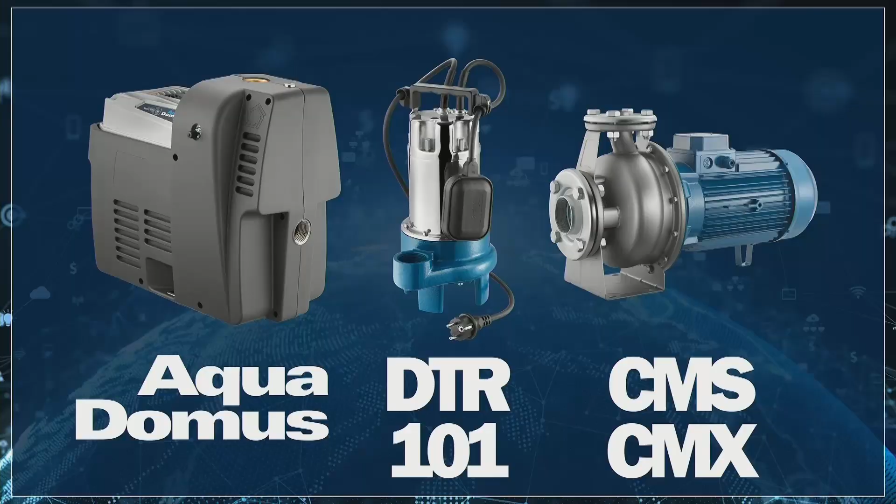During the first part, we concentrated on the domestic and residential sectors, introducing the plug-and-play, energy-saving, smart electronic booster system Aqua Domus, the DTR sewage pump with grinder, and the new line of stainless steel flanged centrifugal pumps.

Today, we will focus on the industrial segment, outlining the great potential that our range can grant. We will show you some case histories of our pumps and introduce the new line of split case and borehole pumps.

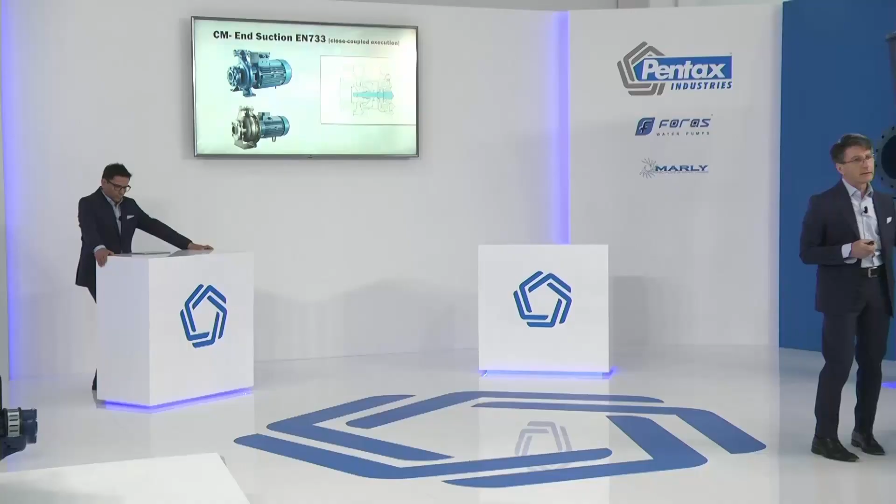So let's start with the end suction, the so-called standardized pump, the EN733 products. This is a very popular pump in the market, known since very long. I mean, it's one of the most classic executions in the market.

And in the market, this pump is known in three different executions: the close coupled, which is the more compact, the lighter one; the stub shaft, which is the medium size for medium power motor size; and finally we have the frame mounted, which is the heaviest, the more capable in terms of performance, in terms of executions, and so on. Pentax is offering today all of them.

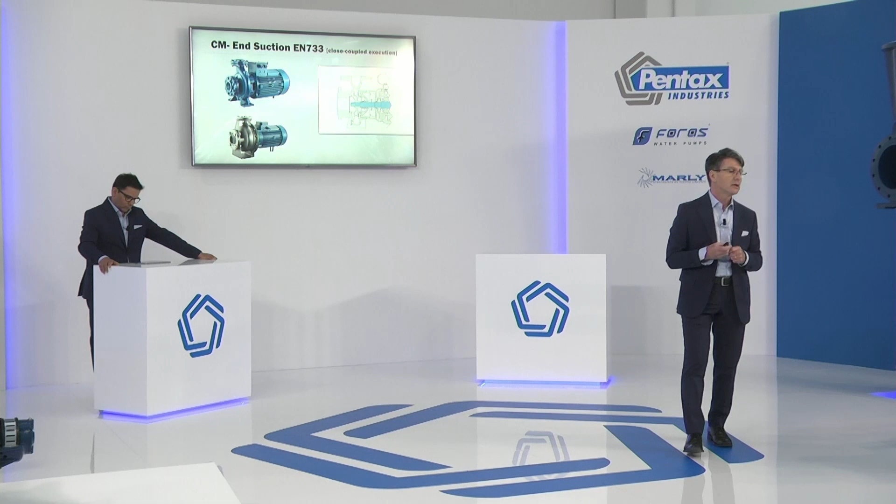So let's look at the close coupled, which is, as I said, the lighter of the three executions, where you can see in the drawing, beside the picture, that we have this blue element. It is the common shaft. The shaft is in common with the motor and the pump.

So that's why the motor, which is a Pentax one according to European efficiency class IE3, has special extensions in order to hold the impeller, and therefore you have a very compact design. At the same time, you have some limitations on mechanical structure. So these executions can handle up to a maximum of something like 37 kilowatt motor size.

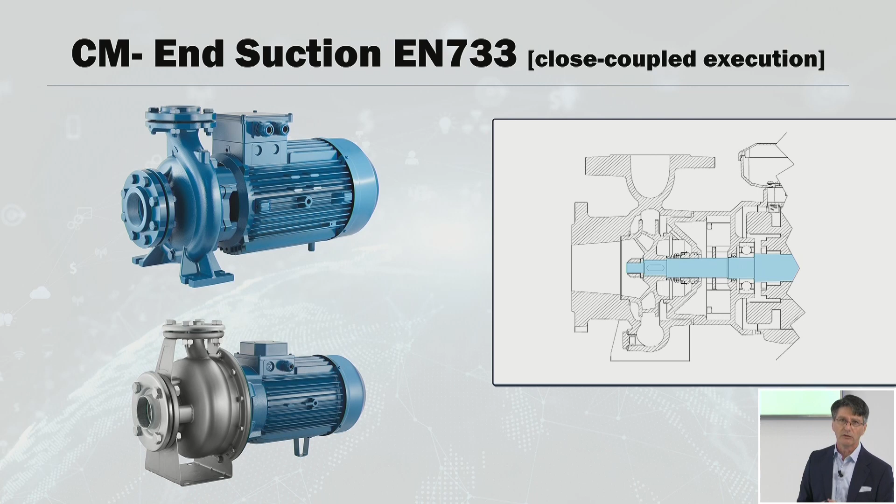Then we have the medium-sized structure, the so-called stub shaft executions. And there we have, as you can see in the drawing, standard motor extensions with the standard B35 flange. So this has a feature that you can locally source the motor in case of servicing. Then you can retrofit the motor according to your needs. So you don't need a special motor or a special shaft.

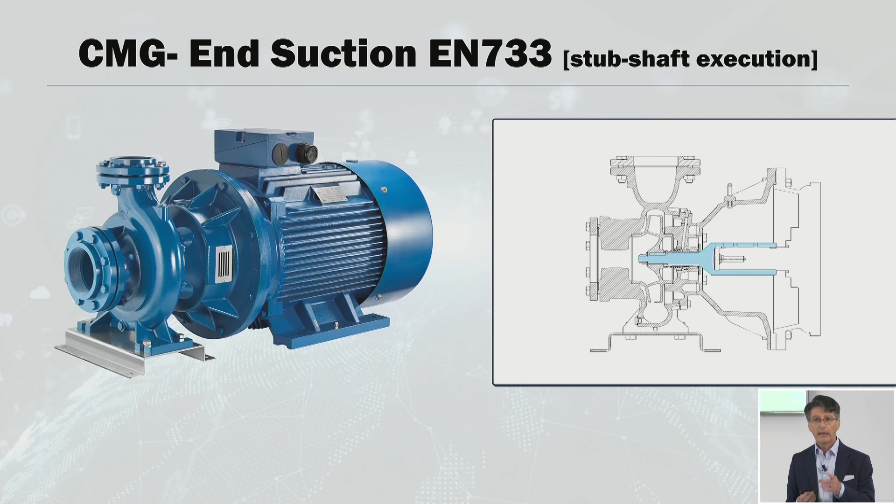And then you can see again in the picture the blue parts. This is the shaft that will enter into the pump, and this is the stainless steel extension as well. With this execution, we are able to cover up to 90 kilowatt motor size. An additional feature on this execution is that we can offer you a full 316 stainless steel pump. So this execution can be suitable for some light industrial applications on the market.

And then we have the frame mounted. The frame mounted, as you can see in the drawing, has an independent shaft. The blue part is the shaft of the pump. And there, of course, the shaft is supported by a bearing bracket very heavily. And after that, we can couple the flexible coupling, B3 execution motor, and everything fixed on the common base.

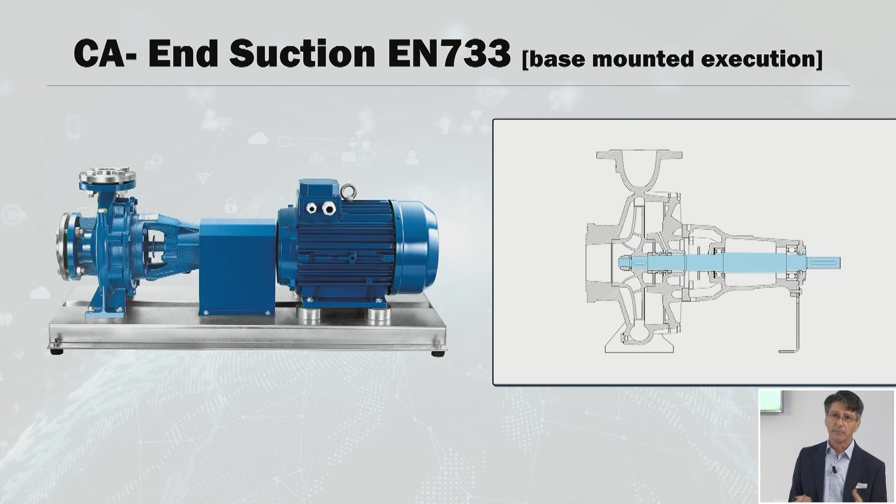This is the more versatile product because you can have cast iron, 316, and duplex material available. So really, this execution is suitable from the residential market up to the more sophisticated and more heavy-duty industrial applications. So it's the most vast pump that can meet all the market demand, let's say.

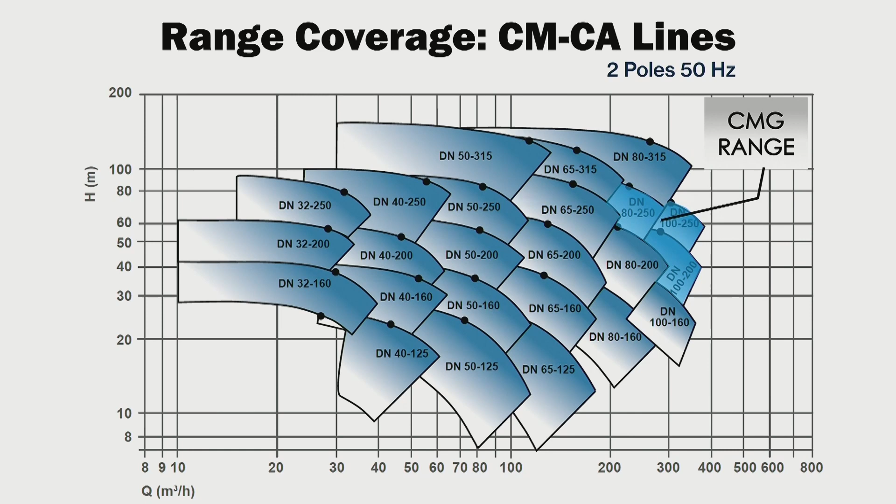Let's now talk about some coverage, some performance information. So this is our coverage for the high-speed pump, or high-speed execution. So the C can be CM, CMG, as well as CA. We can have a maximum flow of about 360 cubic meters per hour. And according to execution, we have a 37 or 90 kilowatt motor installed. You may notice that we have highlighted in a different blue color the new extension of CMG that has been introduced recently, and those are the stub shaft executions that I was mentioning before.

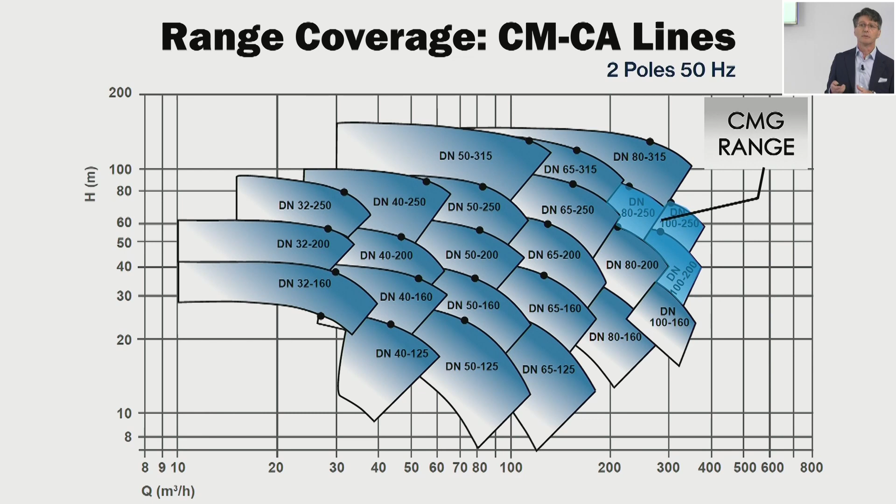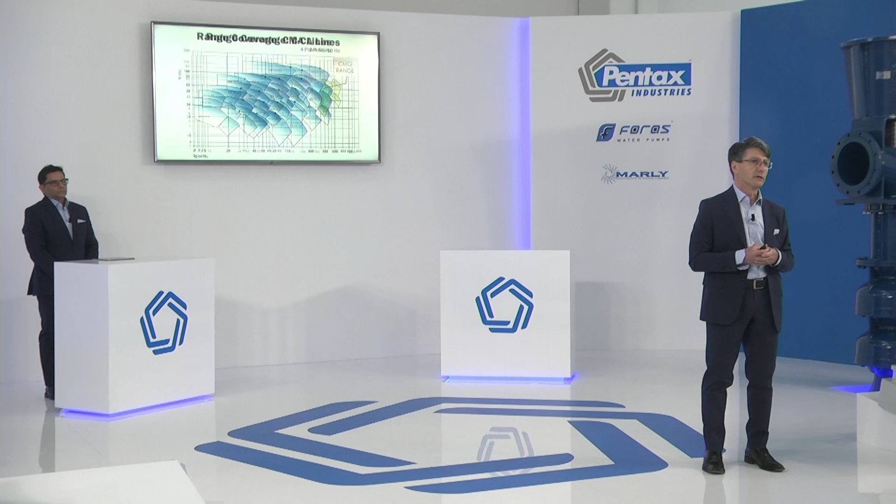Finally, we have the low speed coverage range, and this is the more vast flow range. In fact, we can reach with the newly introduced model up to 1,600 cubic meters per hour. So now we really have a vast and wide range of flow. Pressure-wise, we are about 15 bars because the speed is very low. We are talking about 1,500 RPM, and the maximum power installed is 200 kilowatts. This is a B3 execution motor.

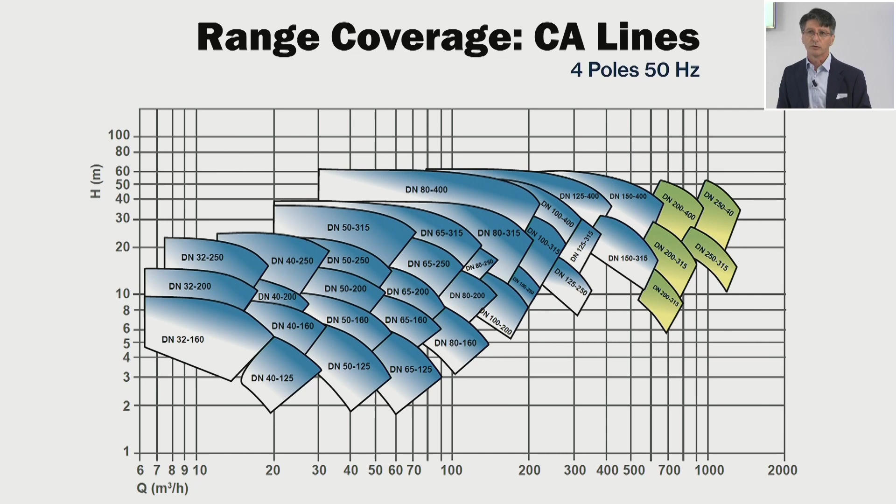Let's have a quick look at the applications. The applications are quite known. The classic application is water transfer, potable water, water distribution, which is the more common application in the market. Of course, agriculture and irrigation is one of the historical applications for this pump.

But then we can have some new applications like water boosting, which is the typical automatic booster sets that normally are installed for feeding towers, buildings, high-rise buildings, and this is becoming more and more frequent and more suitable for this kind of construction market. And finally, we have some industrial applications thanks to the duplex and stainless steel materials available. So we are talking about seawater, reverse osmosis, and any water treatment plant.

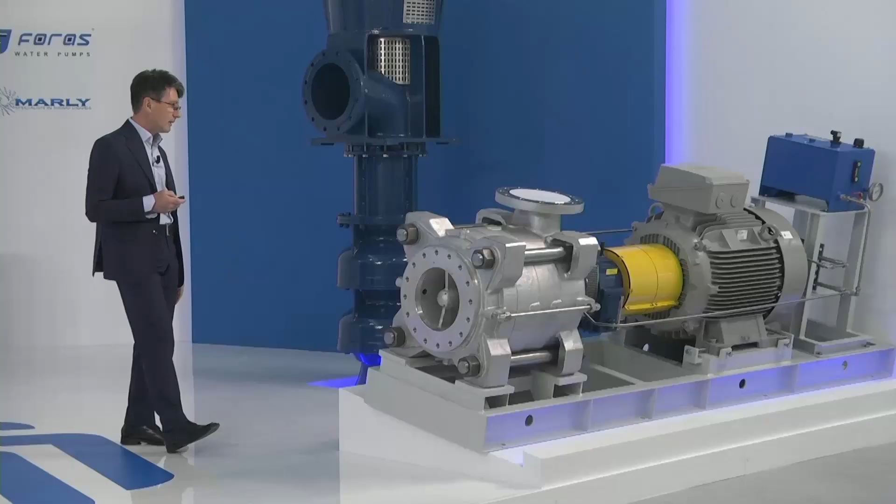Let me now present you the HP line. It is a pump that I have in front of me. This is one of the executions available, which is the axial execution. So we call them HPA executions. Why HPA or axial execution? Because the inlet is exactly in the axial position, so in the front position of the impeller.

What is the feature? What is the advantage to have this position of the flange? Let's say, two main reasons. In this case, we have a very nice suction capability because the piping just enters in the first impeller of the pump. So we can reduce the NPSH characteristic sensibly, much more than a standard pump.

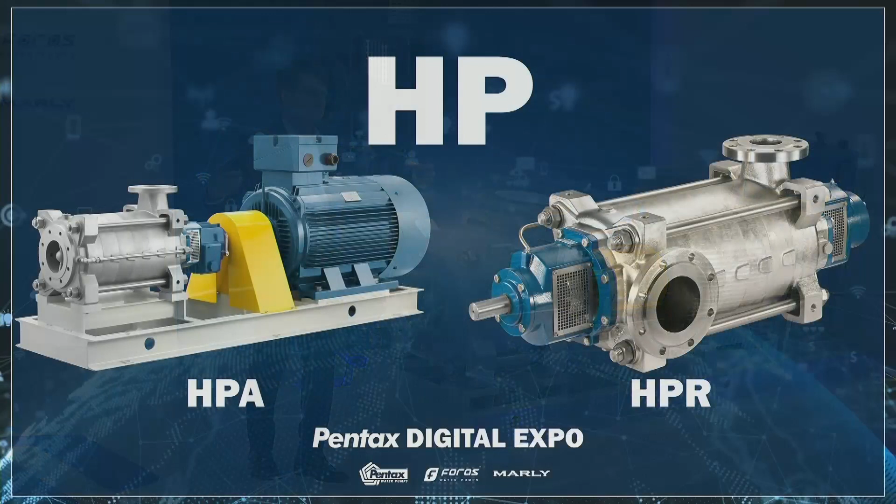The other execution is the radial one, the HPR, which has both flanges, delivery and suction, in the radial positions. And this execution, of course, will have a double bearing housing, and this allows to have many more stages than the axial version, because the double bearing housing can hold the shaft in position, even if we have many stages, and additionally we have a very high axial thrust.

What else? Another important point is that this range is quite a big range of families, because we start from size 32 of delivery, and then we end up to 10-inch, so 250 millimeter of delivery. So just to give you an idea, this is not the biggest pump, but we have additionally a bigger brother than this size.

This pump, like all our product line, is available in 3 different materials: cast iron, 316, and duplex. And this is actually our philosophy. We adopted these materials in our catalog. So in our catalog as well as in our price list, you will see these 3 options of material. Because we learned from our experience that with these 3 options, you can cover 95% of the market demand, starting from the very light domestic application up to the very sophisticated and heavy-duty industrial application. So with only 3 options, we cover practically everything.

A few words about the features. I will not bore you with a lot of technical characteristics, data, performance, and so on, but I would like to spend a few words on only 3-4 points. This pump is available with a double mechanical seal system, and this is the case. In fact, you see this piping entering the bearing bracket on one side and going out on the other side. That is the cooling system of the double mechanical seal.

Thanks to this system, we are flooding the seals with clean, cold liquid, so that in case here we have very hot, very aggressive, and very dirty liquid, the mechanical seal will not see these heavy fluids, but in the sealing phase they will work only with the clean liquid, which is rotating in this piping.

The second feature is what I already mentioned to you, the front suction. Front suction gives you great capability on suction performance. So we can reduce the NPSH sensibly. So in case I have super hot liquids, 150, 180, I have the possibility to reduce the impact in the suction, so as not to have any cavitation effect in this area.

Finally, we have also a cooling fan. It is the picture in your video, number 3, and drawing number 4. This is a cooling fan that is providing a flow of air on the oil bearing bracket, in order to keep the oil cool.

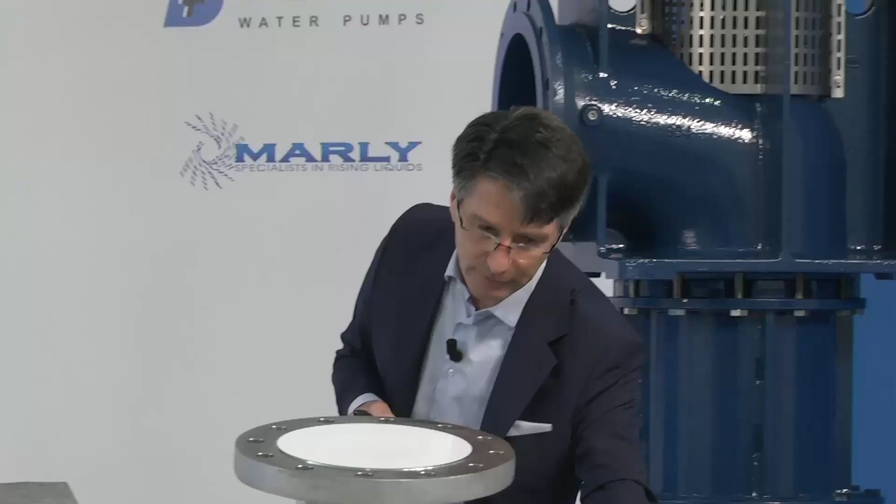So we designed for them this device, including the cartridge mechanical seals. And of course, we also designed an API system for cooling of the mechanical seal. So this was a very nice case.

We supplied them 14 units. 8 of them have been working for about 1 year. Another 4 are going to be installed in the expanded area of the power plant, and 2 more will be used as spares. What's important is that we overcame the problems that our competitor's pumps were facing.

Thank you. Thank you to you, Pierpaolo. A few data points about this installation, then we'll move forward.

The liquid being pumped is brine, at 165 degrees C. The salty content is about 30,000 ppm of chlorides, meaning we are very close to seawater aggressivity.

The sand content is above 100 grams per cubic meter, very thin sand, which provides a very abrasive effect on the blades of the impeller and diffuser. This requires a very low speed pump, a 6-pole pump running at less than 1,000 RPM.

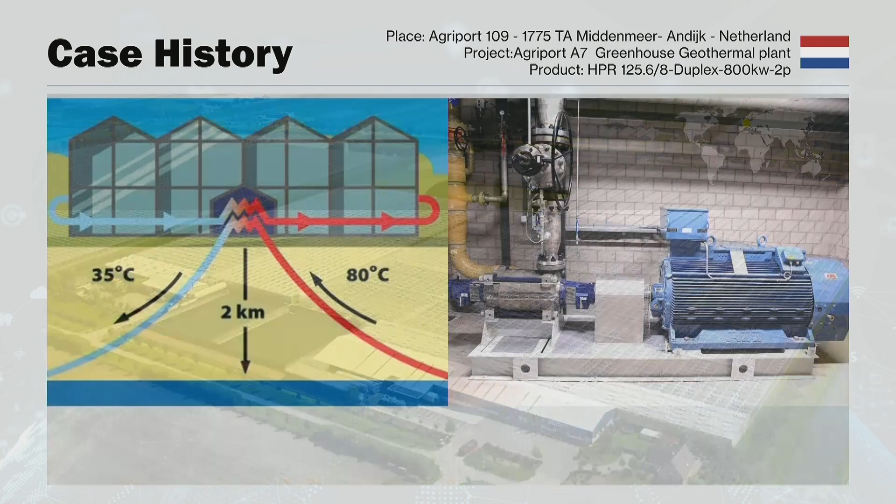In this application, see the drawing, the yellow drawing. What we did there was the re-injection. After the full heating process, they use our pump to re-inject the condensate water back into the ground.

Why re-inject? Why do you need high pressure? You need high pressure because the production wells for the steam are under pressure. To give you an idea, to re-inject the water back down, this pump was running at 55 bars in order to overcome the pressure of the well and push down the liquid that was sucked from the production well.

You can see the photo on the screen. We used an ABB motor, 800 kilowatt size, medium voltage at 6,000 volts, with an ABB inverter, because they need to guarantee stable pressure on the well, otherwise they get problems underground.

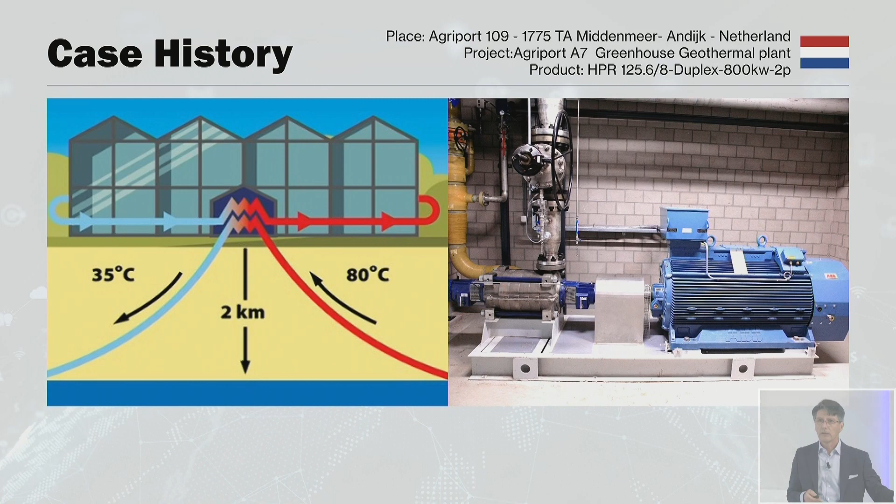Since how long has this pump been operating? We installed this pump about 3 years ago. That's also a good question, because since that time, this pump is still working. No major servicing has been required.

The only thing in our installation manual is the oil changing. Since this pump works 24 hours a day, 365 days a year, in this continuous operation you need to change the oil at minimum every 6 months. Don't forget it - think of it like keeping your car running all day long. You really need to have the oil changed constantly.

So it's a pump on 24-hour duty, 365 days a year. It only stops for maintenance, for the oil change. Please keep in mind that oil bearing lubrication is one of the more efficient methods, because it has good lubricating properties combined with the ability to evacuate heat from the bearing area. That's the advantage of oil lubrication.

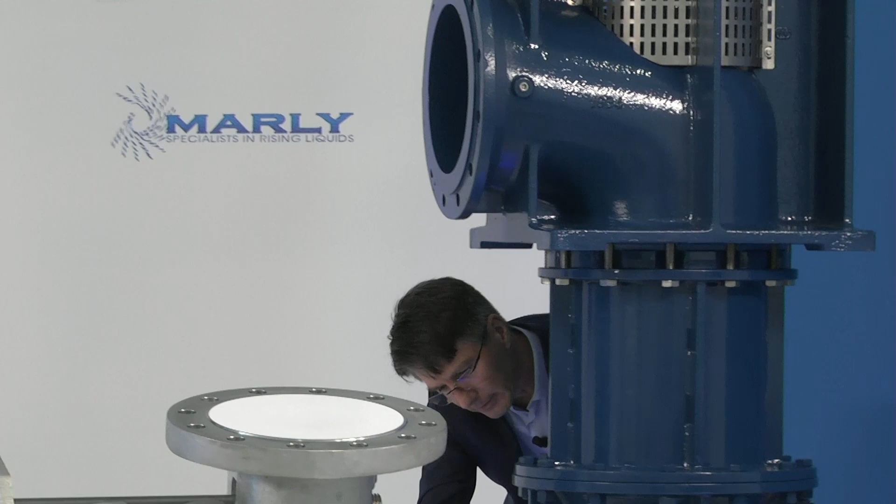Well, let's switch now to the other key product line for us, which is the vertical turbine. Here we have a sample - actually this is the big brother. Our range starts from 6-inch size up to 22-inch size, meaning this sample has a diameter of 22 inches, so 600 millimeters diameter for the stage.

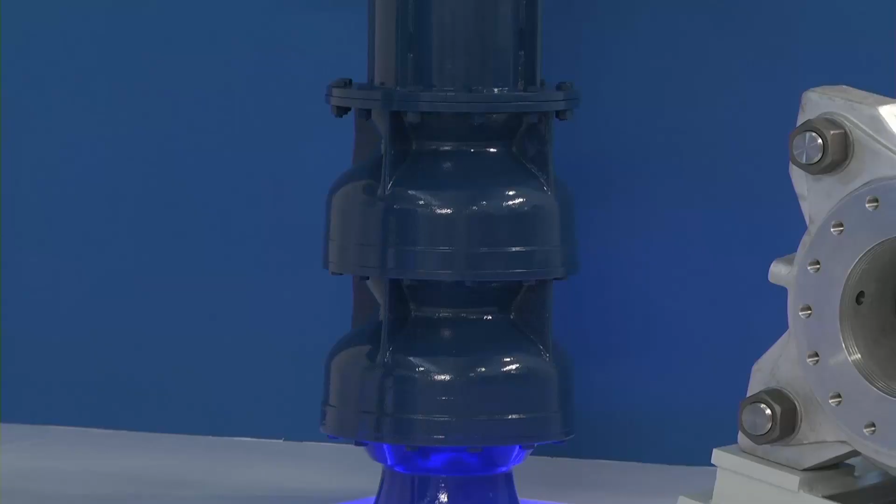This is also an important range for us. Our philosophy is to have 3 materials available: cast iron, 316, and duplex. Thanks to this material availability, you can install this pump for standard potable water up to very chemical or seawater applications, thanks to the duplex material.

No other data, I don't want to bother you with a lot of information, but a few features. Our standard executions use the conic coupling, shown in your picture as drawing number 2. Why do we use conic coupling?

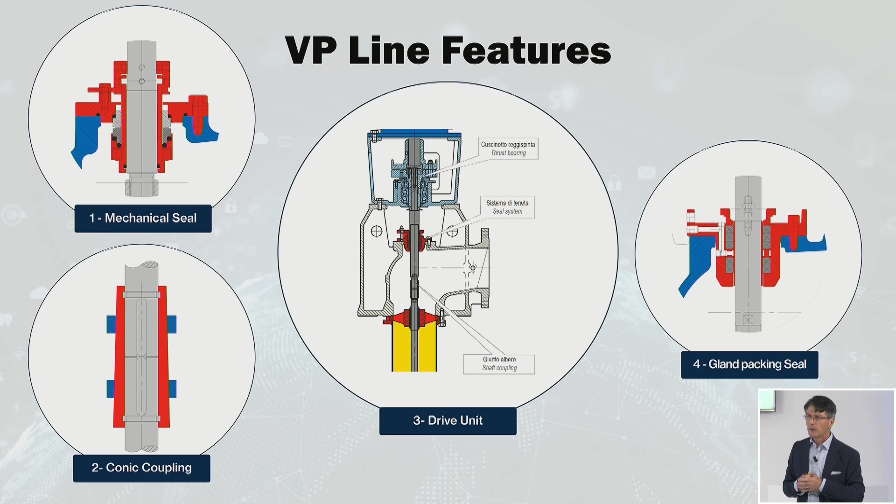The conic coupling is the device which connects shaft to shaft, from the pump to the line shaft to the drive head. Any connection needs to be coupled. If we use conic coupling, we put the shaft in the perfect axial position, so we do not have vibration due to improper positioning of the shaft. Moreover, in case of servicing, we can dismantle easily using these two rings, the blue rings, the two elements. Even after many years of operation, you can get your shaft open, so you don't need to cut or perform a lot of difficult operations to open the pump, disassemble, and reassemble.

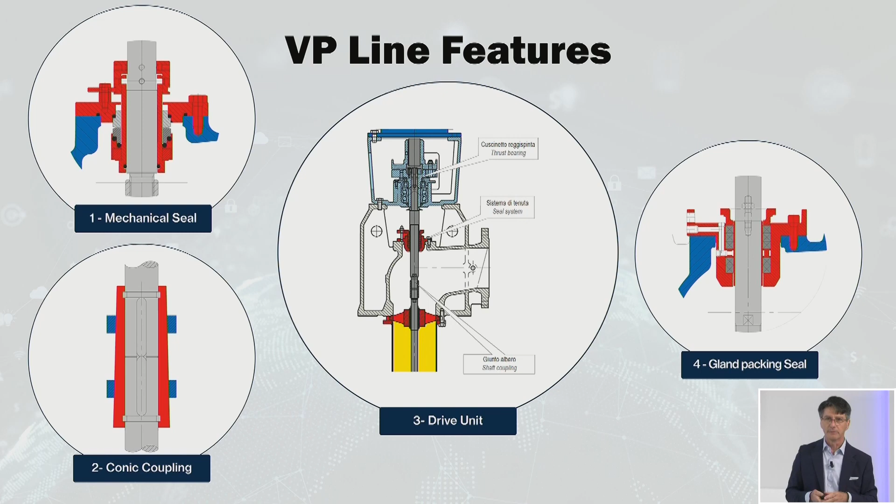Another option is the mechanical seals, located in this area. We could have gland packing, single seals, cartridge, or double mechanical seal in case of very aggressive liquid. Last but not least, in the same drive head, we have the thrust bearing, which can be provided with oil or grease lubrication.

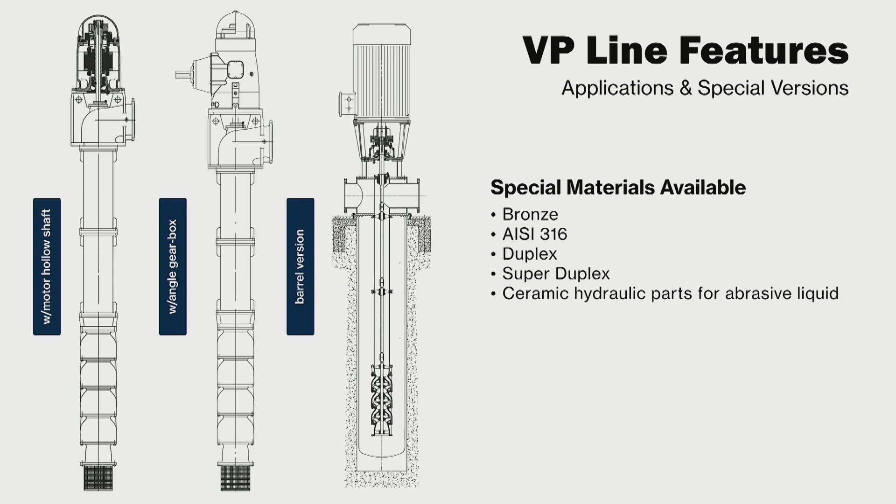Special executions are available. You can see on the drawing, we can have a hollow shaft motor, very common in North America, where the thrust bearing is located inside the motor. The gearbox is the central execution when you need to couple a diesel engine motor, which is very common in rural areas, in agricultural irrigation areas where electricity is not available. Finally, we have the barrel, shown in the right-hand drawing. The barrel is an inline, pressurized tank, typical for boosting, firefighting, or even condensate applications.

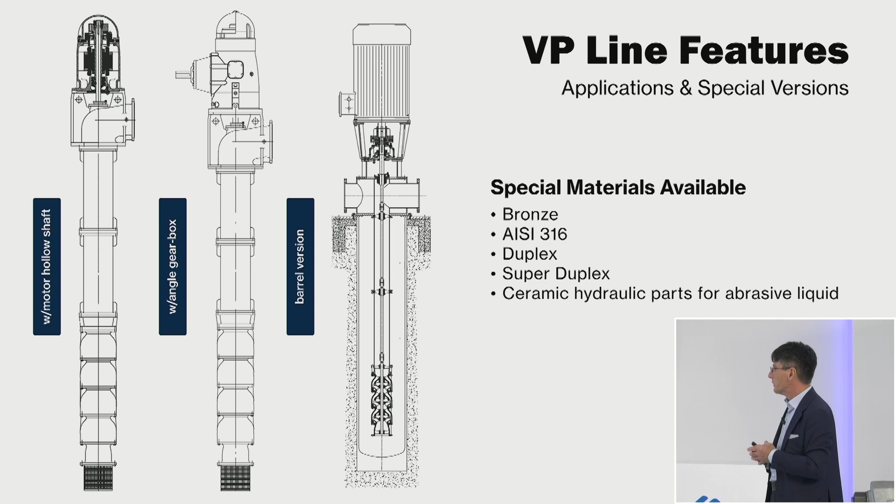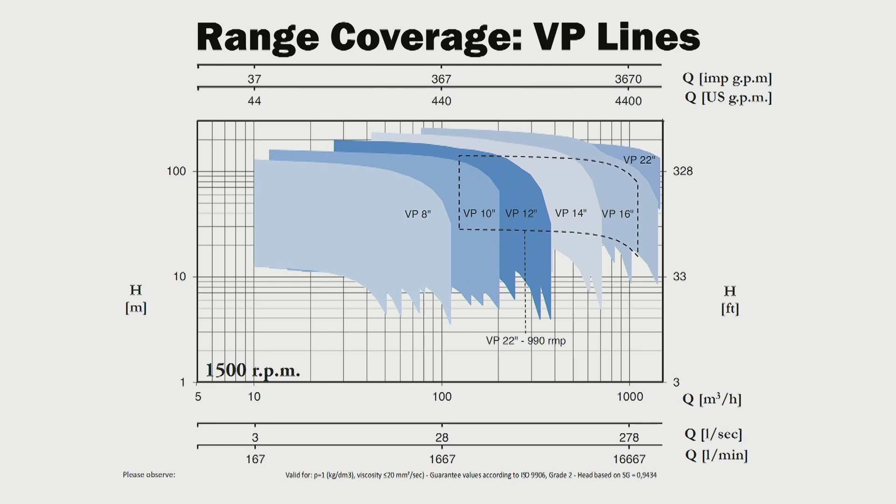Coverage: as I mentioned before, we have a very large flow performance, going up to 1,600 cubic meters, maximum pressure of 26 bar, and installed motor power can be up to 630 kilowatts. But eventually, if you combine with a diesel engine gearbox, this power can be increased significantly.

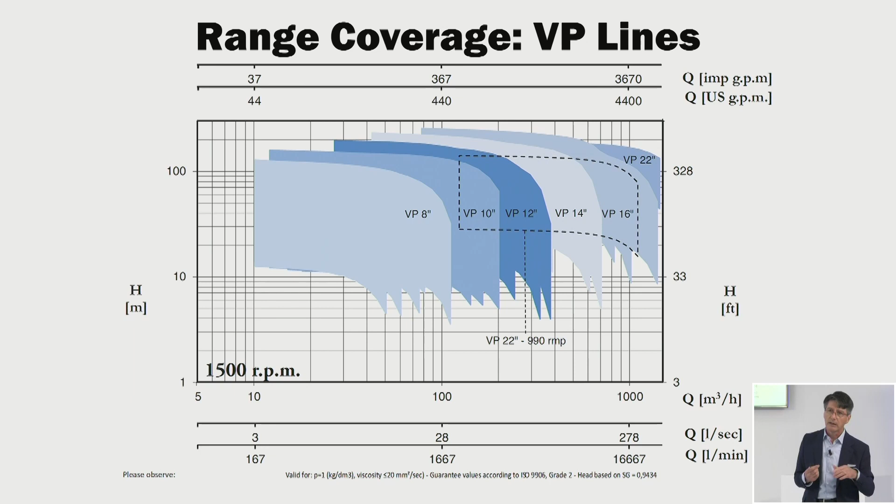Applications: historically, this line was developed for deep wells, back when borehole pumps were not available — we're talking about 20, 30 years ago, this was the only solution. The surface part was here, and the rest was immersed in the well. This was the only case, but now the borehole solution is much more convenient, efficient, and less expensive, so this execution is less used in that application. It's moving more into industrial applications, such as in tanks.

At the top of the tank you have the drive head, and at the bottom you have the hydraulic parts. Why in the tank? Because in case of hot or aggressive liquid, the hydraulic parts are in contact with the liquid, but you keep the motor in a safe, non-hazardous area. So the motor can be standard — that is the great advantage of the vertical turbine.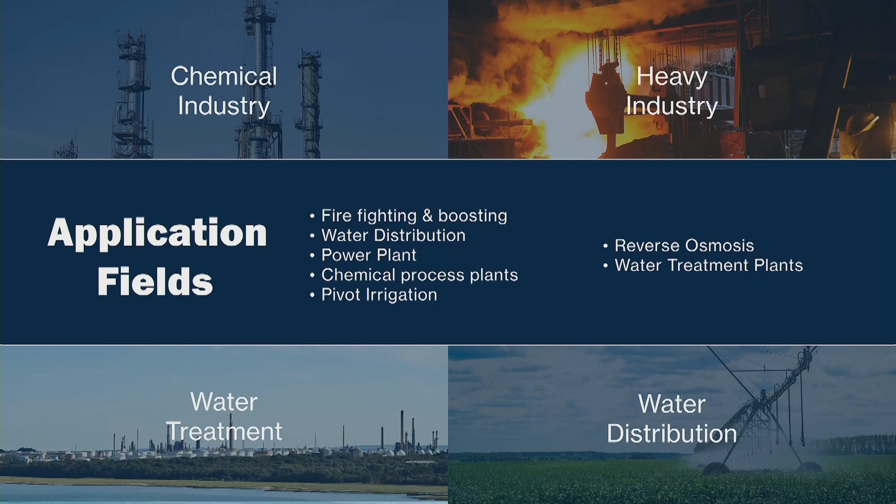Water distribution, power plants — power plant, why? Because we have stainless steel, and with a vertical turbine, you don't have a problem with NPSH because your pump is immersed in the liquid. So power plant condensate applications are ideal. Pivot irrigation, going back to historical applications, agriculture, large plants. Reverse osmosis water treatment, because of the stainless steel.

Let me now give you another successful story of this pump. We move back to Italy now, to the center of Italy on the Adriatic Sea, where we installed a smaller version of this sample at the so-called Porto Corsini power station.

That is a very giant Enel power station, a turbo gas plant powered by gas. The size of this power plant is 700 megawatts. Think about that — we were talking about Cerro Pabellón in Chile, which was 81 megawatts. This size is 700, just to give you the magnitude of the plant.

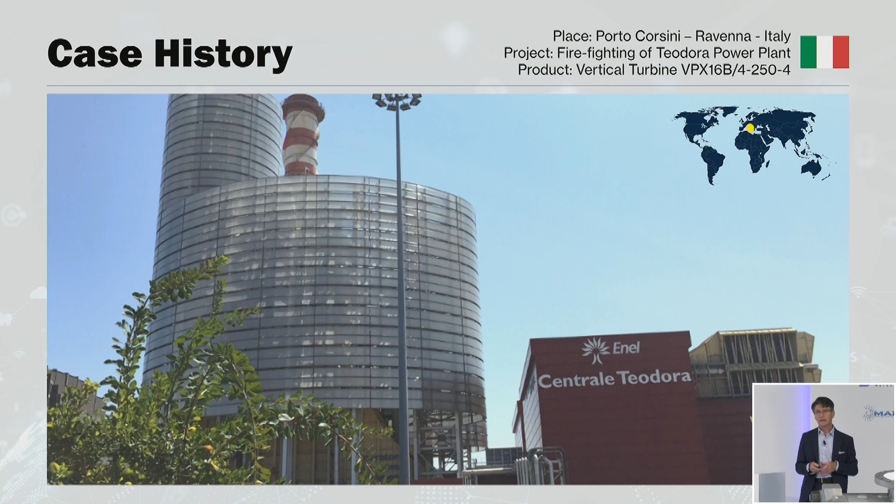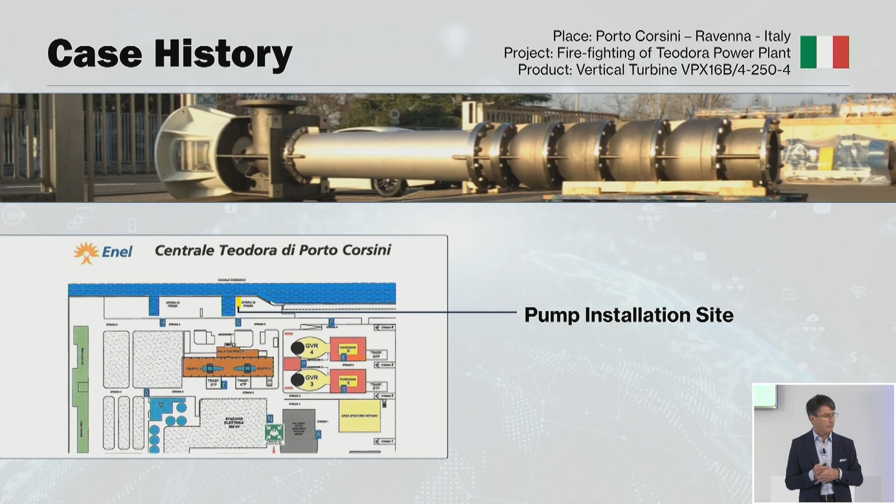In this plant, they asked us to provide the firefighting units. Look at the drawing there, which shows the location of the pump — directly on the sea channel, so practically the pump is sucking seawater. That's why the pump was made completely of stainless steel 316. With one unique pump, we were able to provide the extinguishing system, the firefighting system, for the full power plant. The pump provides 550 cubic meters per hour flow.

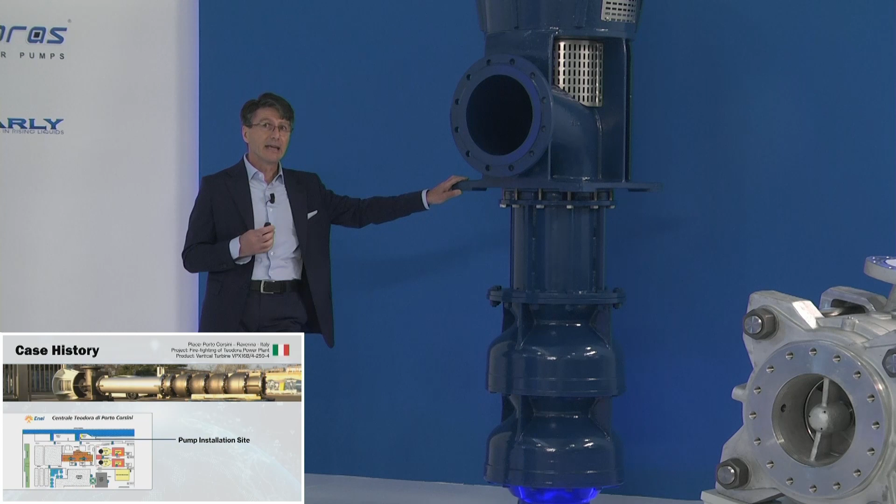The application is quite hard, because of the medium — seawater. Moreover, the pump is kept running once per week for a few hours, because they need to ensure that in case of need, the system is operative. So this pump runs with seawater at shut-off pressure for a few hours. That's why it's a quite heavy-duty application, I would say.

Which lubrication is better for the thrust bearing? Nice question. Well, in this case, we provide oil lubrication in the thrust bearing on top, on the drive head.

I would say that the most professional lubrication for any bearings, roller or ball bearing, is oil. Why? Because oil lubrication, rather than being able to lubricate efficiently the rotating parts, is also evacuating the heat produced by rotating parts. So it provides two different effects to the bearing.

So, double positive effect. Compared to grease lubrication, we have a disadvantage, let me say disadvantage, that regularly you need to change the oil. So according to the type of service, intermediate or continuous, you need regularly to change the oil. So it needs more maintenance.

Bravo. On the other hand, grease lubrication is normally provided with a sealed type of bearing, so it's so-called life lubricated. Whenever you install this bearing, you let the pump run up to the end of its life, 2, 3 years, 10 years, and whenever you face some problem, you take the bearing out and replace it. So it's more practical, let me say, the grease lubrication.

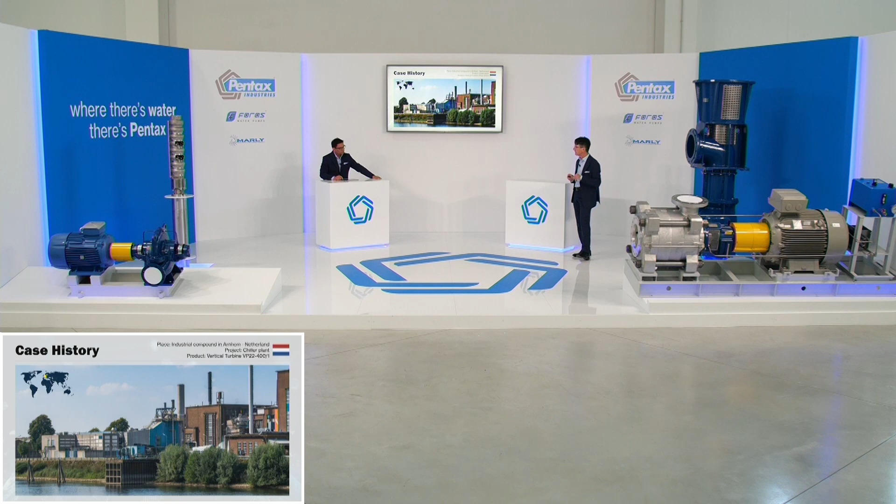So in this project, what we did, we replaced an existing pump on which there was installed a 315 kilowatt motor. By doing the same job, delivering the same flow and the same pressure, we were able to use a much smaller motor, 250 kilowatt. So imagine the energy saving that we provide to this system.

For this pump, do you supply even the foundation plate? Not in this case actually, because there was the existing foundation plate, so we just cared to get the connection holes and bolts suitable for the existing foundation plate.

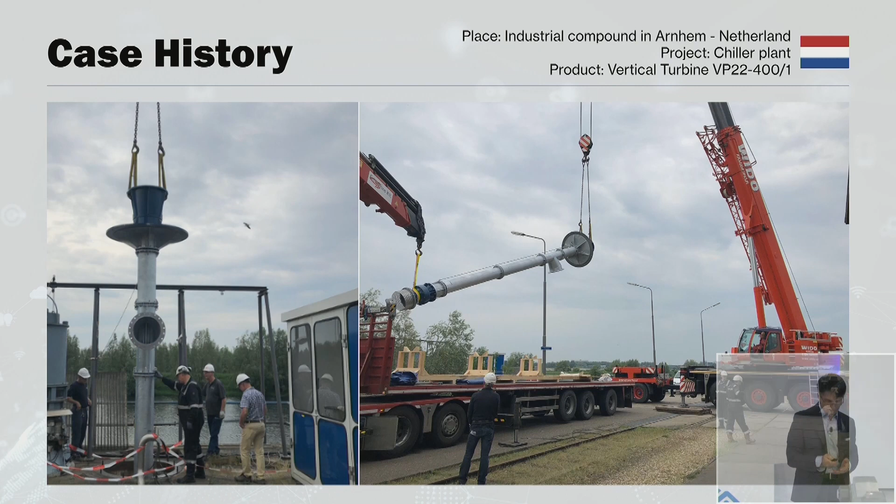But in case of need, yes, we can provide you the foundation plates, which is very recommended for this application, because the foundation plates that we provide have adjusting bolts so that you can put these plates in the proper horizontal position, so that the pump coming after will be positioned and placed perfectly in the vertical position, so as not to have any misalignment of the vertical shaft. Thank you. Bene.

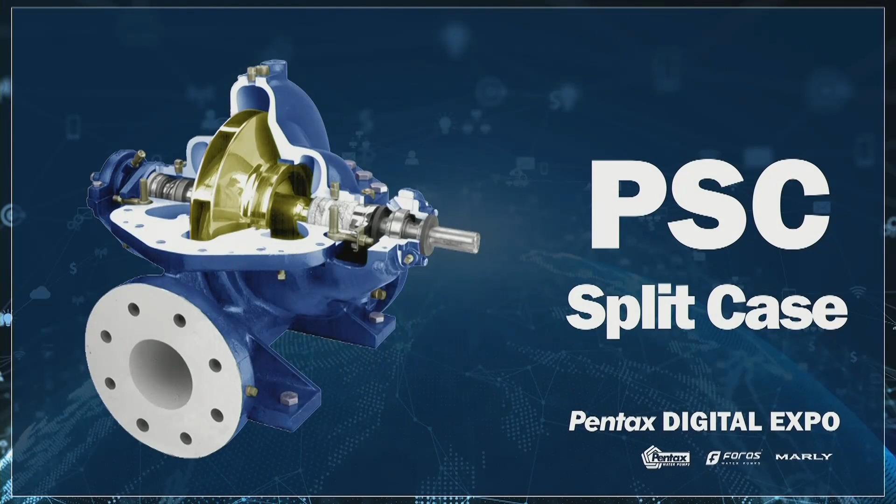I ended the existing products, and I would like now to go into the more interesting topic, which is the new products that, as introduced in the beginning, is the mission of the company. So providing constantly new solutions to our partners and our distributors. Split case line, our name, we call this new baby the PSC line.

This is actually quite a common pump also in the market, it's not really new. But let's say that this range of products, combined with our existing products, end suction, multi-stage horizontal and split cases, really provides a much more complete and comprehensive range of solutions.

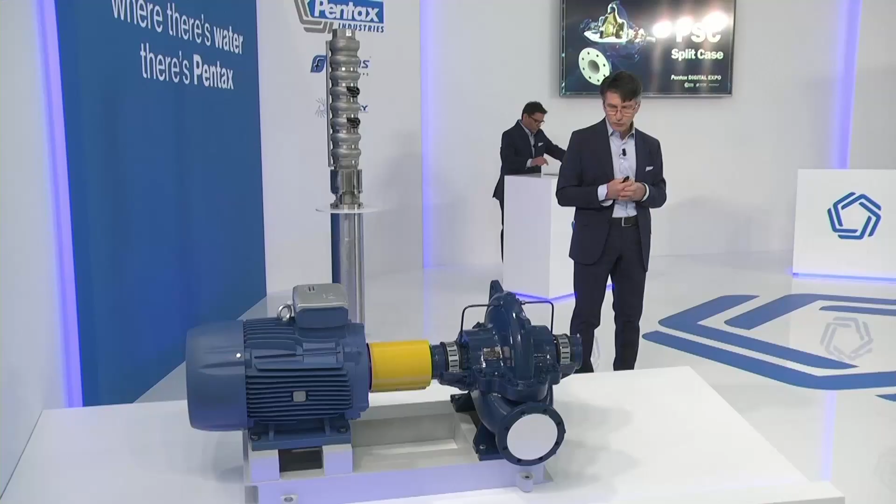What are the features of this range? Well, first of all, the range is quite extensive. We start from size 65, this is one of the smallest, and we range up to 600 millimeter delivery flange, so think about 24 inch delivery flange.

The material availability is the same concept as all the other range families, so cast iron, 316 and duplex. The flow availability here is much wider than our existing products. We can reach up to 6,000 cubic meters, so tremendous flow.

What are the key features of this product actually? I would say that by far the key feature of this pump is the balanced impeller. Why is the impeller balanced? Because we have a special configuration, you can see on the upper drawing. We have a special impeller design with double suction. By this design, the rotation of the impeller is auto-balanced. So the pump shaft doesn't produce thrust, so it's self-balanced.

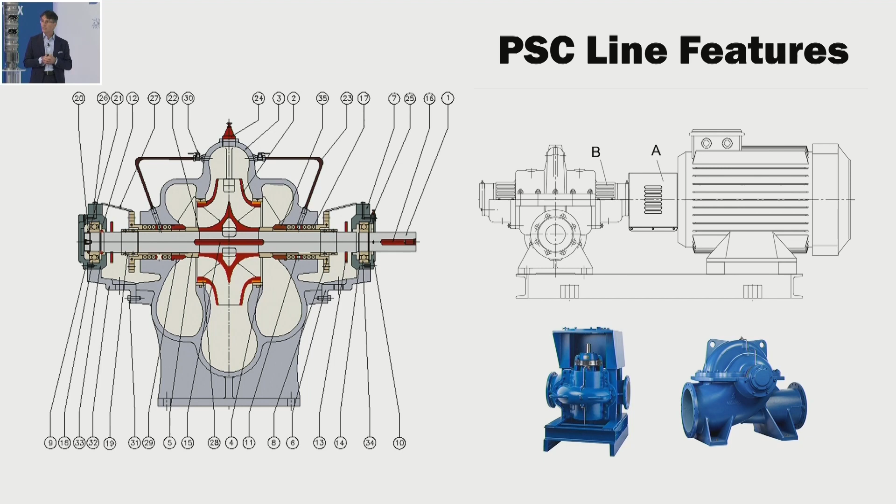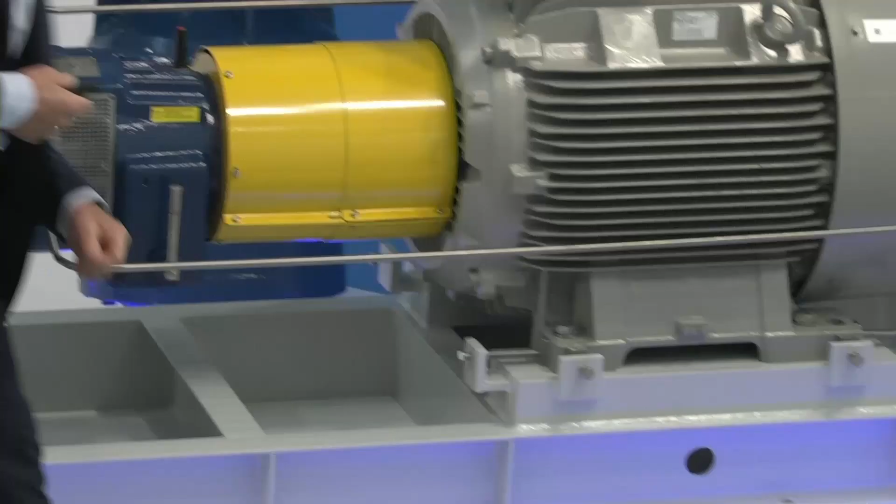We can reach up to 86, 87% of hydraulic efficiency, which you can rarely reach with the multi-stage and end suction pumps in the market. We have our strong baseplate. Here we have a small motor size, but in the big motor sizes, all our range is provided with this bolt pusher on the foot of the motor.

Those devices are provided when the motor has a power size above 75 kilowatts, and these are vital in order to move the motor precisely, to set the alignment of pump and motor precisely, in order to avoid any small vibration during the operation. So those devices are available on all our multi-stage as well as the split case line.

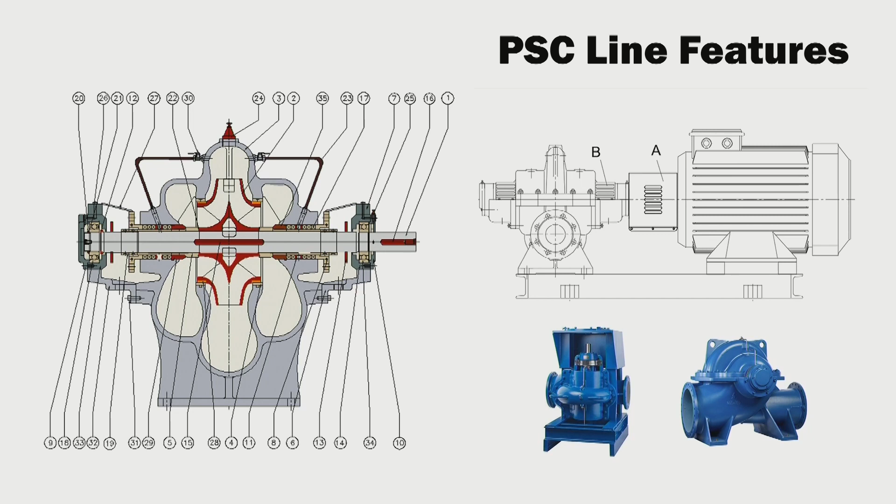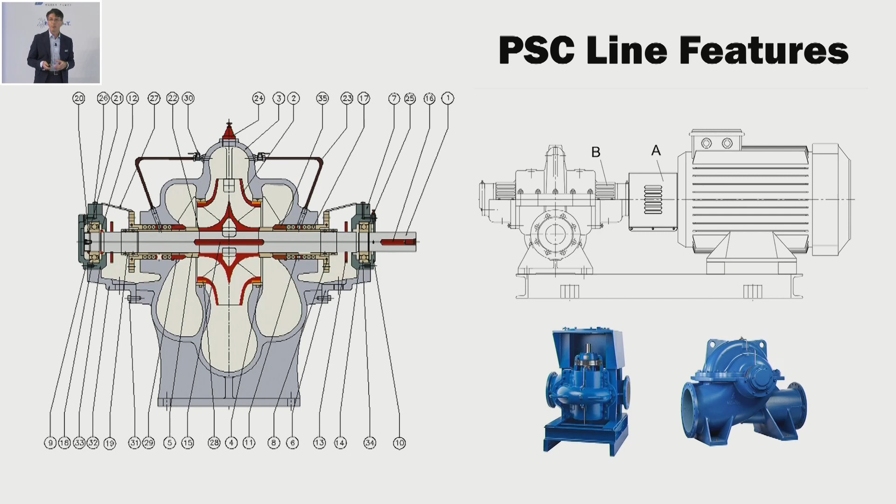Another feature of this line is that it is available in horizontal classic execution like this one: base frame, coupling, motor B3 version, and horizontal pump. As you can see in the picture behind me on the main screen, we have the inline execution with the vertical V1 motor. This is a very compact design and lets you install the vertical frame motor. Execution available in 2, 4, 6 poles.

Performance coverage: we have 2, 4, and 6 pole speeds, and we can reach up to 6,000 cubic meters flow. That's why, as I mentioned, this range is very complementary to all we saw till now. So this is completing the offer in our basket, and providing really new potential business opportunities to our clients and distributors.

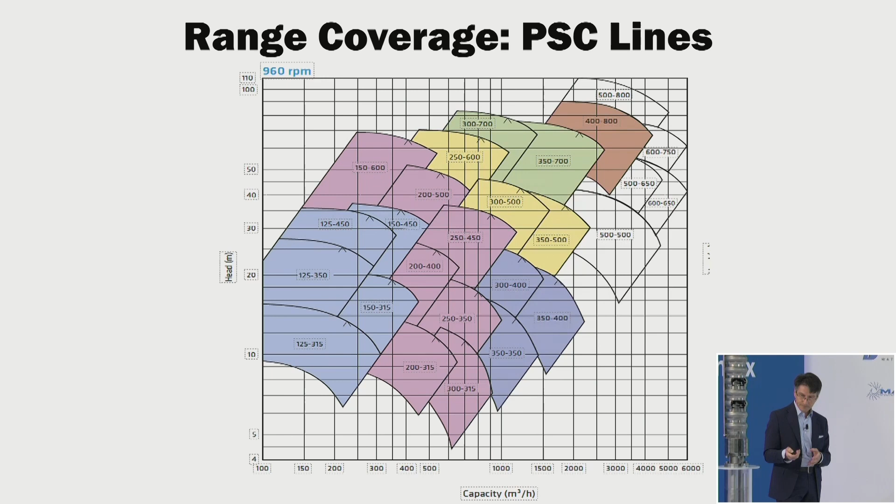Applications, I'll just mention a few words on the key applications. The first, ideal application is HVAC. Why HVAC? HVAC is heating and ventilation. Especially in the Middle East, you have the chiller application, the cooling system, which needs the pump rotating 24 hours per day, 365 days per year, never stopping. And for this kind of application, you need low noise, low vibration, and long life.

Nothing is better than a split case, because it has no thrust in the shaft, no vibration because of the balance system, and very high efficiency, so energy saving solutions. Cooling tower, which is a special application in HVAC. Municipality, water transfer, potable water: because of the large flow, with one pump you can feed a full city's potable water.

Agricultural irrigation, large flow. Firefighting, again, because whenever you need a big amount of flow to extinguish, in an emergency you don't have to be careful about the flow; whatever you are able to pump, the better. Then the split case is an ideal solution.

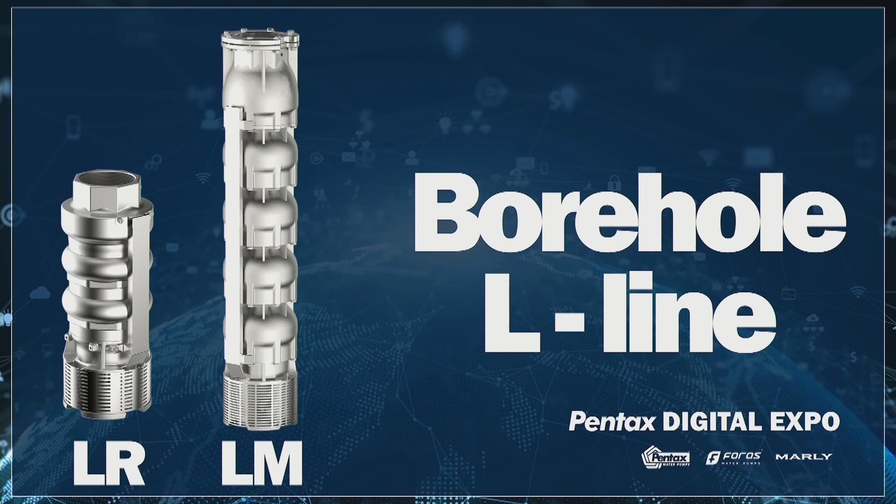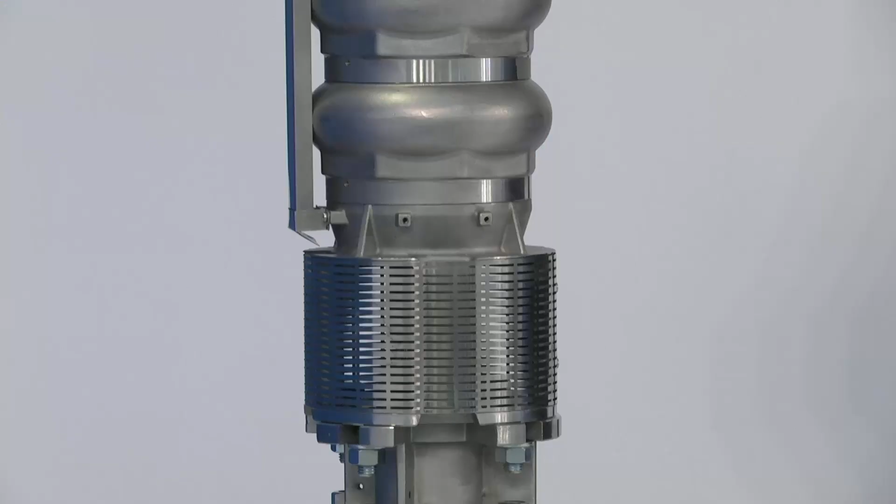Let me now end my presentation of new products with the Borehole line, the so-called L line. Actually, this is not really new. As you may have noticed in our catalog, we launched this line 3 years ago. But since we got a very positive response from the market initially, very good results on orders, on tenders, and so on, we decided to further develop both the radial and the semi-axial models.

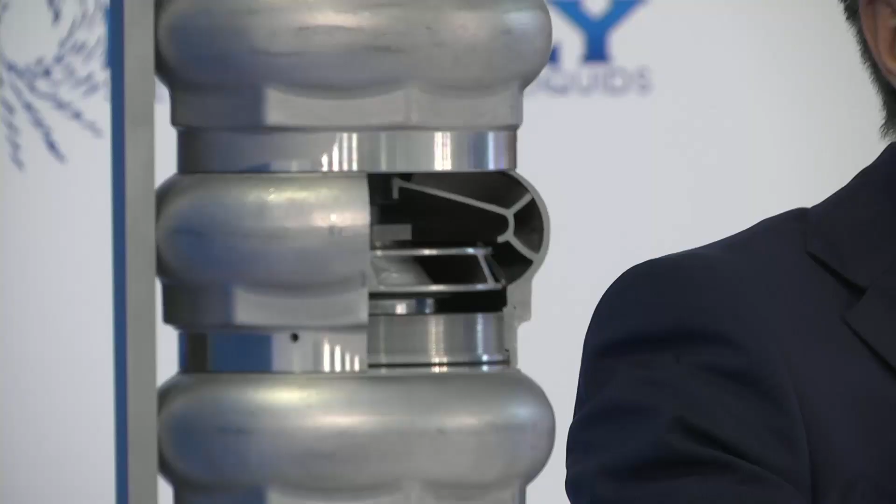Just as a small refresher, this line is built with precision casting technology. What does that mean? By this type of casting, we can produce a very smooth surface of the diffuser blades and the impeller blades. This means high efficiency because you have less drag in the impeller vanes. Additionally, the walls of the parts are very thick, so we have more reliability, more abrasion resistance, and more sturdiness. So you combine efficiency with sturdiness of the product.

Well, what we did to upgrade this line is in the mixed flow line, which you may see now in some pictures, which is actually not this one but the other one. If you can switch back to the mixed flow, exactly that one.

What we did actually, we designed a special shaft capable to handle many more diffusers, many more stages, in order that we were able to combine the high efficiency with the high pressure. That's why we got maximum pressure delivered by the pump over 55 bars and maximum installed motor power of 400 kilowatts.

In the drawing, you can see the very sophisticated configuration of the blades, which provide the very high efficiency. This configuration you can get only with precision casting. With a standard casting, it's quite difficult to have this hydraulic design of impeller and diffuser.

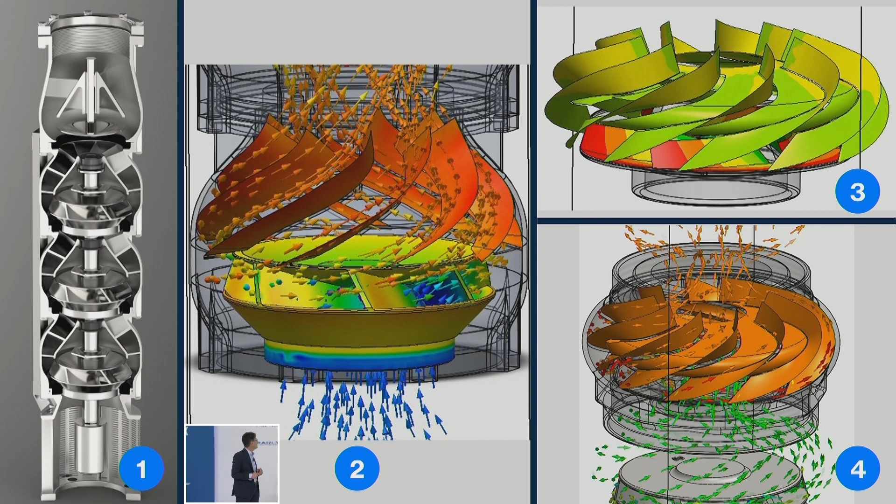Well, if you move now in the screen back to radials. In the radial type, which is actually this sample, we completely redesigned the pump. If on the semi-axial we just added more stages, on this pump we completely hydraulically redesigned the impeller and the diffuser. What was the main aim? The main aim was to sensibly increase the efficiency, because as you know, all radial pumps in the market are very poor in efficiency. So our aim was to be able to overcome this gap in the market and to become one of the leaders on efficiency in this line.

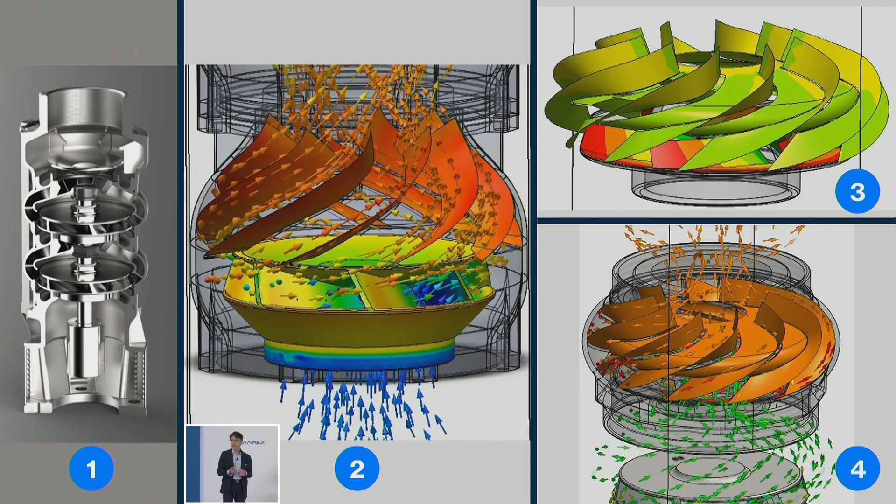And how did we achieve this goal? We combine, as you can see in picture number 3, a radial impeller, which provides high pressure, with the semi-axial diffuser, which provides high efficiency. So we combined the two positive characteristics of the two different pumps, let's say. And with this special design, think about it, for the 6-inch range we are able to achieve 77% of hydraulic efficiency. Practically, if you look in the market, you can count on one hand the competitors which can offer this. Same in the 8-inch.

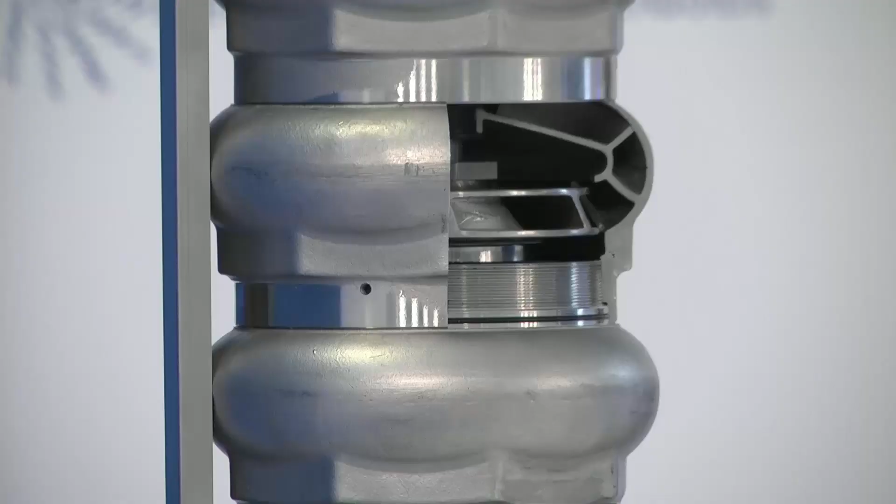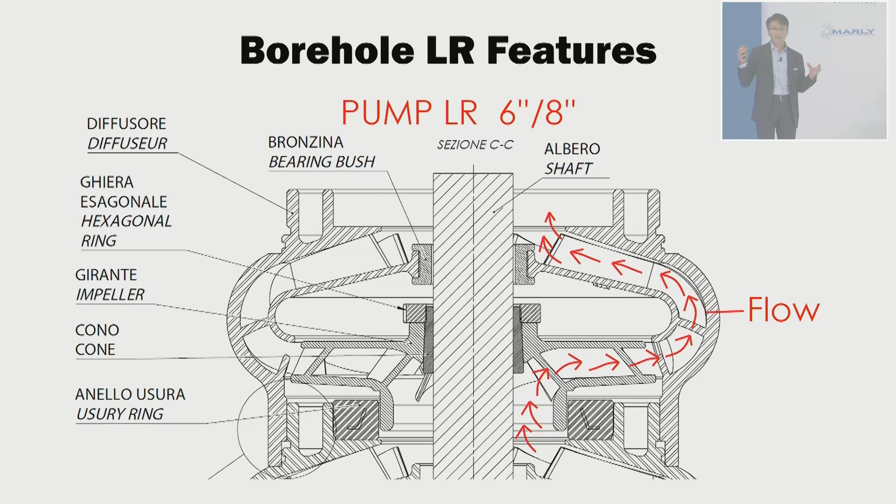So by this special threading system, we got a very easy assembling, which provides you very easy maintenance. And additionally, we got a very great static performance. As you know, we are testing all these pumps in our assembling up to 100 bars, because as I told you, this pump is going to operate above 70 bars, so we need to be much higher in order to stay on the safe side of the mechanical strength.

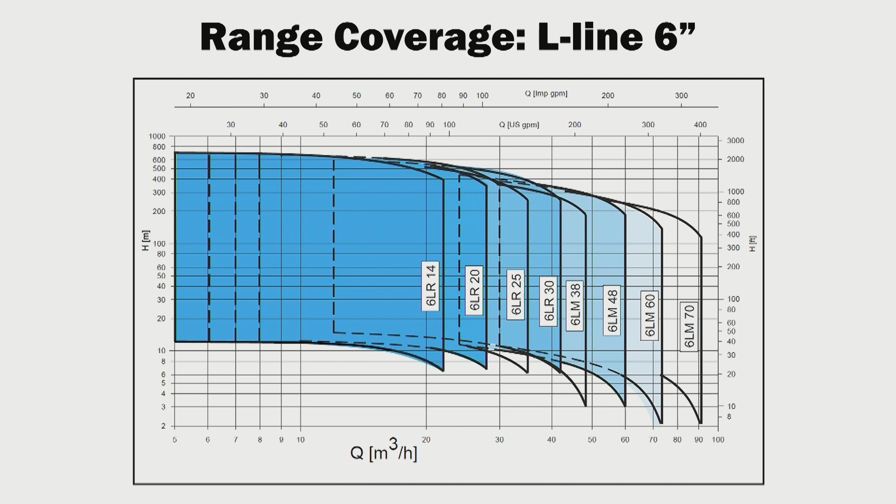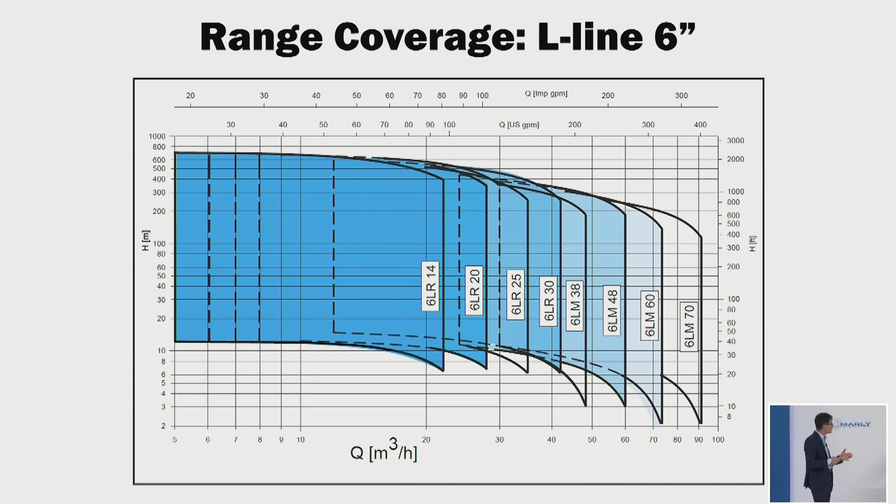Coverage. You realize that we have a unique coverage. I would say in the market you will not find a 6-inch range so well covered. In the shut-off pressure we can reach above 75 bars, meaning you can dig your pump down to 700 meters, which is a requirement coming more and more in the Middle East area, where the water table is sinking more and more because of the needs of drinking water.

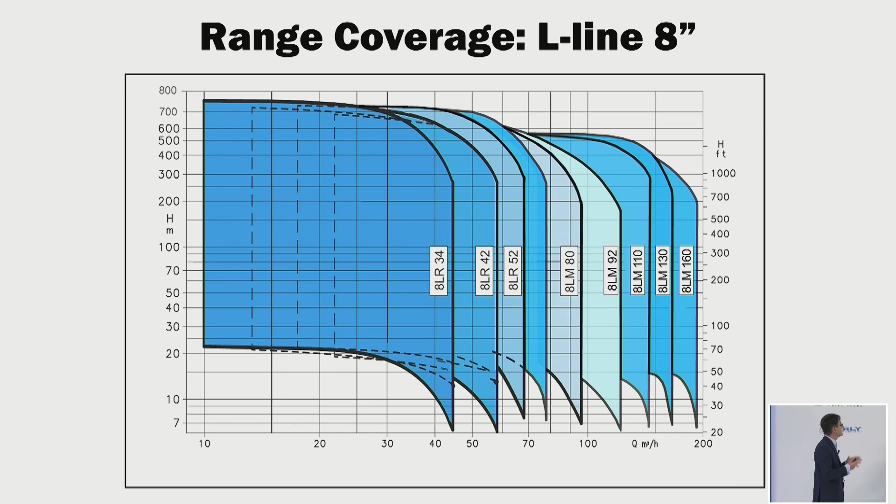8-inch, very wide availability of models. From radial, we have 3 families of radial design, and another 5 models of semi-axial, giving you a coverage, again, really unique in the market, combined with the great efficiency that I was mentioning before.

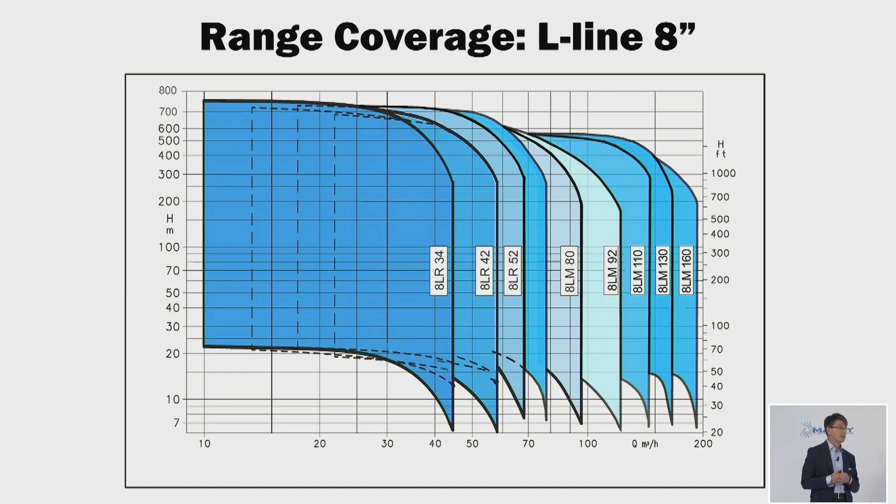10, 12, and 14-inch are our bigger brothers of products, which provide you a maximum flow of 850 cubic meters of flow, and shut-off pressure reaching 80 bars, maximum installed power 400 kilowatts. So we can provide you even 10 and 12-inch motors with this power size.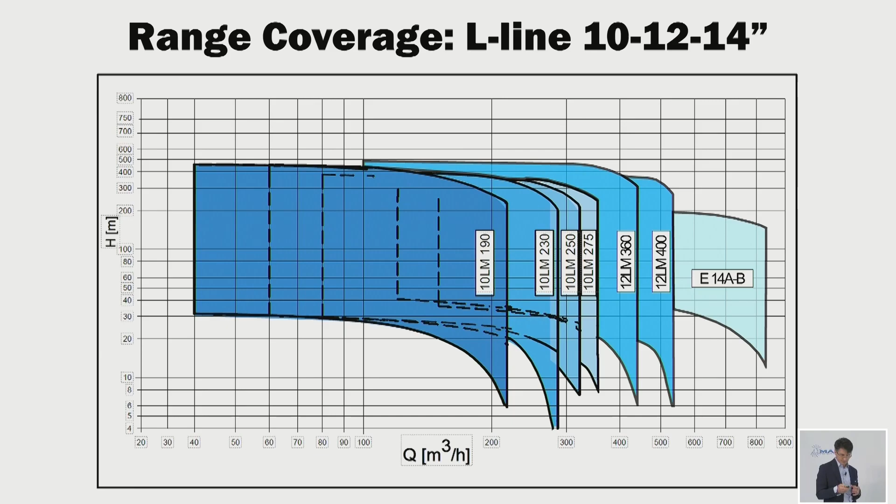Ending with the applications, of course, borehole is nothing less than deep well application. So whatever it is, water distribution, in case of municipal systems sucking the water from underground, any agricultural irrigation, pivot irrigation, any ground or deep well water handling, landscaping. But also let me tell you, thanks to the materials that we have in this line, stainless steel duplex, we already sold many units of this pump to reverse osmosis as intake units. So whenever you have a reverse osmosis plant close by the sea, they need an intake pump immersed in the sea. So this pump is ideal for this application.

Well, Pierpaolo, I'm at the end of this presentation. If you received some questions, or if you have some questions, I'm really happy to answer. Yeah, well, thank you very much, Gianpaolo, for your nice presentation. Yeah, we received a couple of questions.